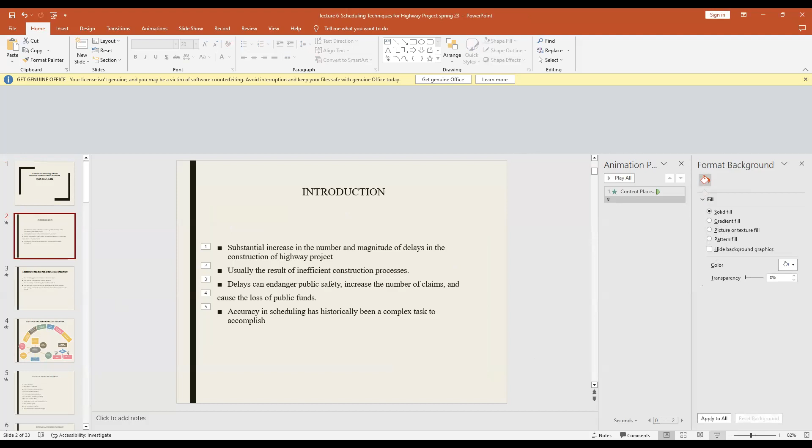Now, we all know that scheduling a highway project is a complex process, and we have seen and experienced over the years, both as executing engineers as well as the general public, that most highway projects are not completed in time. This stands true all over the world, and it's very difficult to schedule and complete a project, especially highway projects, because of their different nature. It is very important to understand the concept behind scheduling of highway projects. So my lecture today will focus on all these issues.

Why do we need to do this? Because there is a substantial increase in the number and magnitude of delays in the construction of highway projects that mostly results in cost escalations, and often projects that were supposed to be completed the previous year are postponed to the next year. So this is one of the reasons that we must understand the concept. We must understand the values that should be used in conceiving a highway project right from the beginning. And obviously, this may be the result of an inefficient construction process that you find in many parts of the world.

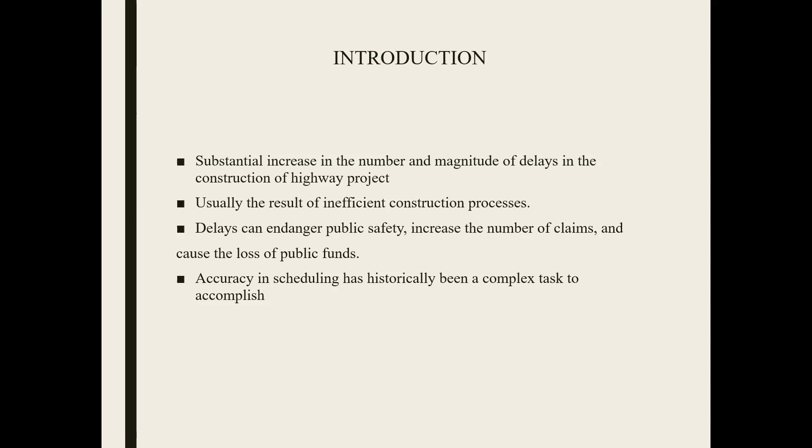And because of the delays caused to the user, it often results in accidents, because vehicle users want to go early. They are known to travel on those roads as fast as they could, and because of the inefficient geometric detour that has been provided or any other thing, this can always be a safety problem. And as highway professionals, we all understand that accuracy in scheduling has historically been a complex task to accomplish.

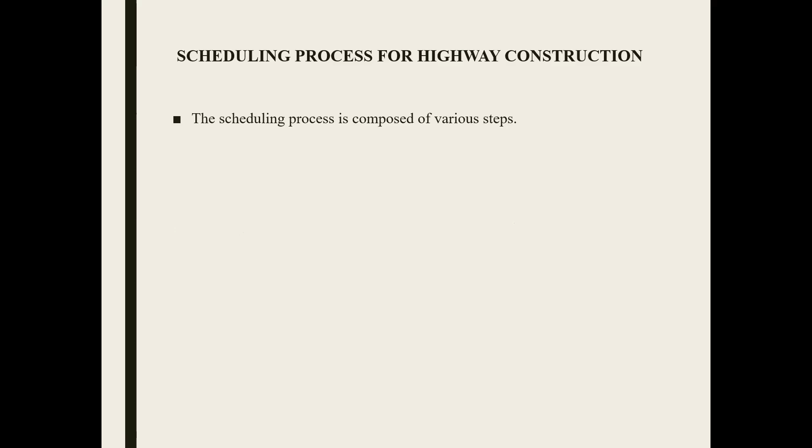Now let's see the scheduling process one by one, and I'll try to explain this in detail. It is composed of various steps, as you all know. The first thing is to determine the contract duration. This is the time allowed for project completion as determined by the sponsoring agency or highway authorities of an area. In most cases, it is part of the contract document, and it is set in the early bidding stage.

Because contract time has a major effect on the whole construction process, it has to be based on reasonable, realistic assumptions. Severe time limitations placed on construction will result in high bidding prices and could lead to extensive claims. On the other hand, if we are lenient with the contract duration and allow excessive time, the public is denied the benefit of a needed facility. This can be an intersection, a road, a bridge project or any other project.

Now, the method used in scheduling also has an impact on highway construction. Normally, when the bid is circulated, the contractor is asked to submit the schedule, he submits the schedule, and then that schedule is approved. Those accepting authorities must be aware and must fully exploit the scheduling method carried out by the contractor. If the method is not effective, consequently, the execution will not be okay. It does happen that sometimes the scheduling procedure is only on the basis of the paper to be submitted, and it has no practical application.

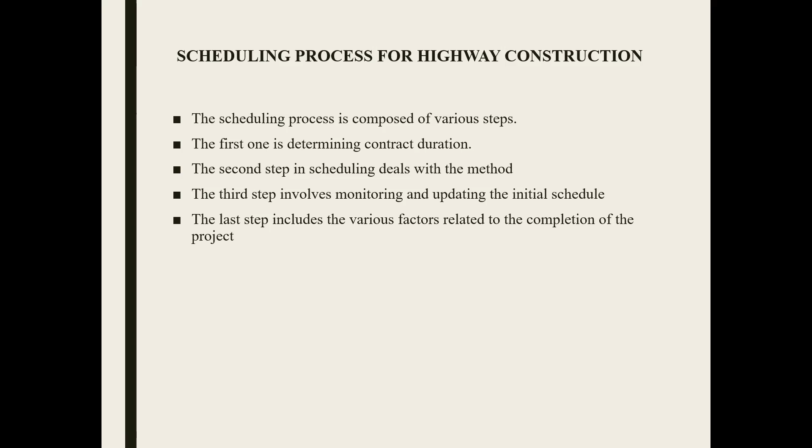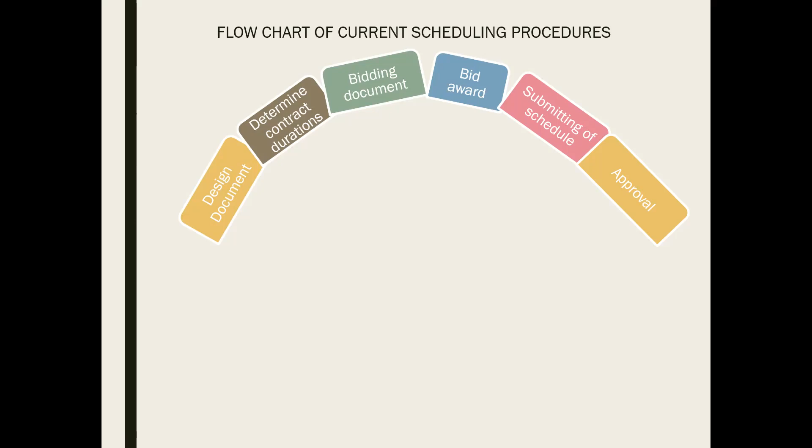So this is the flow chart. We start with the design document, whatever is designed. Then we determine the contract duration. Then we prepare the bidding document, award of the bid, submitting of the schedule, and approval. So this is the flow chart of what normally is the procedure for highway construction projects.

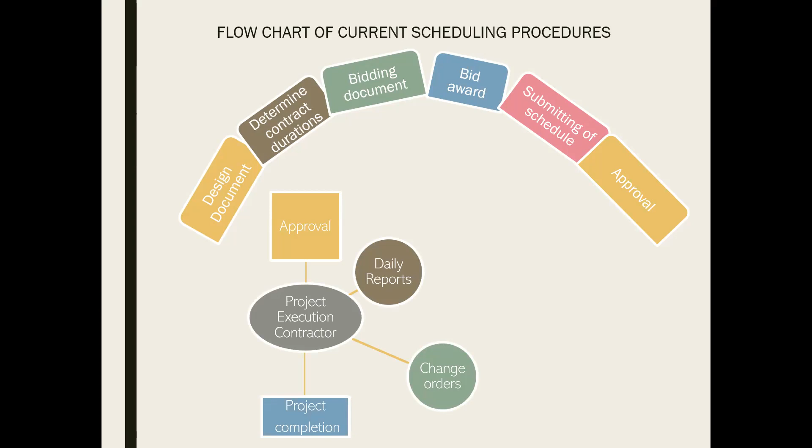Then once this is done, there is project execution by the contractor. After approval, he has to file daily reports, to notify the change orders, to notify the project completion, and ask for any time extension. This is caused because of the change orders, and obviously the delays. Once you ask to submit the time extension, it means it's a delay.

Most of the delays are because of the change orders, or maybe because of unforeseen things, like damage of the underground utility, or some other land issues that come up once the project is being executed, or any other legal issue that causes the delay. Once the project is completing, if it is yes, then finish. But if it is no, then the claim starts.

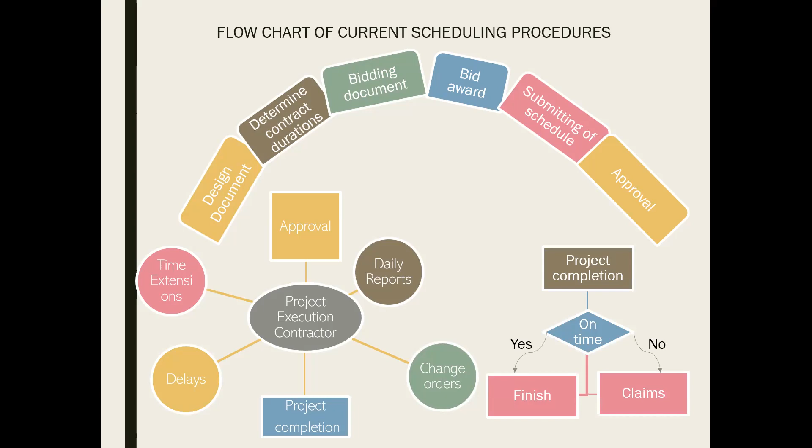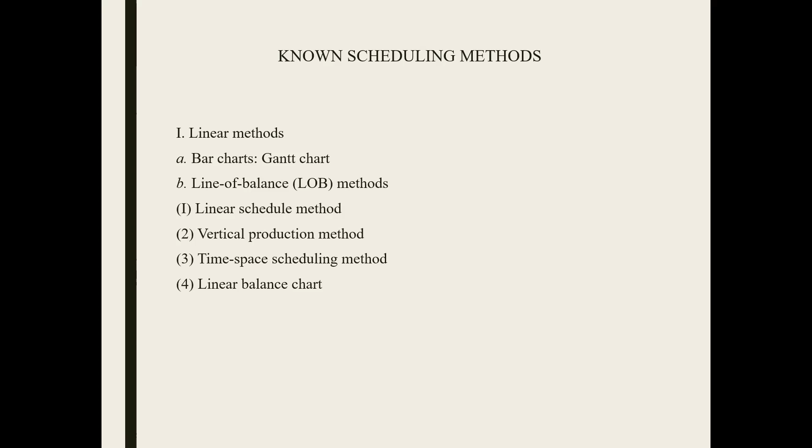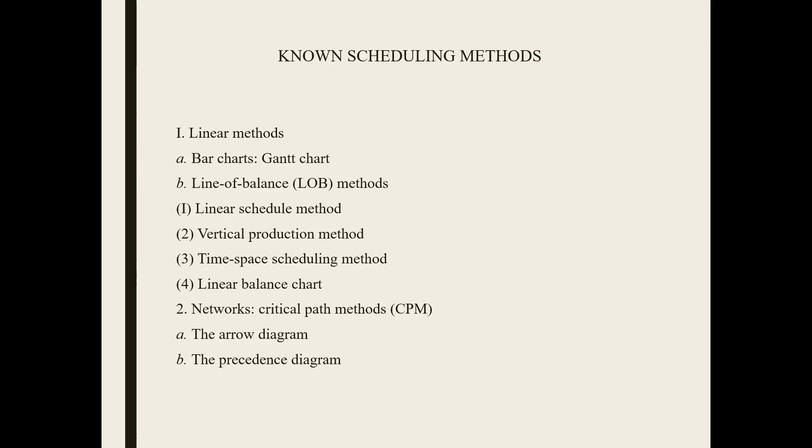So what are the known scheduling methods? First one is a linear method in terms of bar charts, a very old method. Then there is the line of balance method, linear schedule method, vertical production method, time-space schedule method, linear balance chart. In this lecture, I'll explain the time-space scheduling method of line of balance. Then we have the critical path method, which is also a part of this lecture. It includes the arrow diagram, precedence diagram, and project evaluation and review technique.

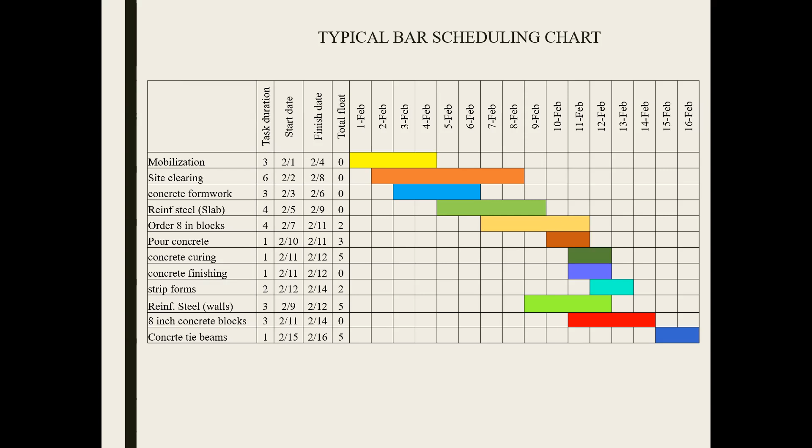Now, in order to calculate the float, we subtract the earliest finish date from the latest finish date. Also we can subtract the earliest start date from its latest start date as a total float. This will be explained when we go through the critical path. Now, the advantage is that it's very simple and graphically visible. It's a preferred tool adopted by almost all agencies in field operations, and it also helps in demonstrating the proposed schedule for a construction project.

The limitation is its difficulty in showing interrelationship and interdependency among the project activities. It does not identify critical activities that control the project, and it is not as effective in managing, controlling, and updating the schedule of the project. For example, if there is a delay, we have to revise the schedule. With today's computing, it's very easy to change it and reprint it. But sometimes people get lost about what has been updated when.

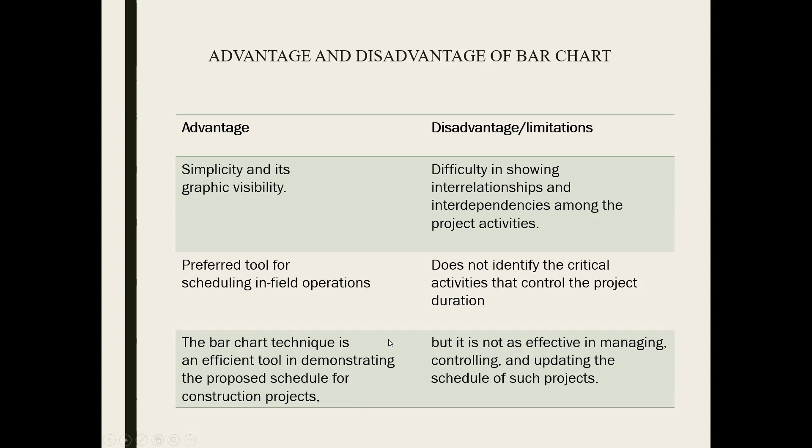Then comes the line of balance method. For today's lecture, we'll stop; we'll discuss the line of balance method in the next lecture. I hope that this lecture is important, and I have explained the basic concept. So we'll have another lecture on the line of balance method.